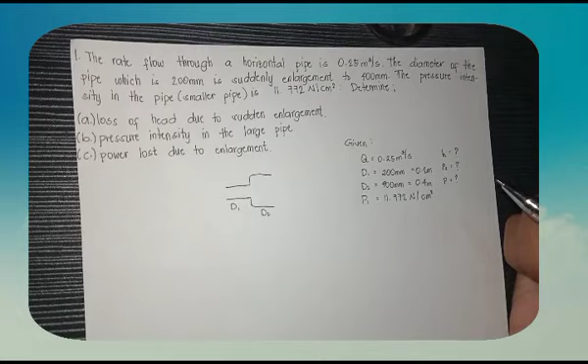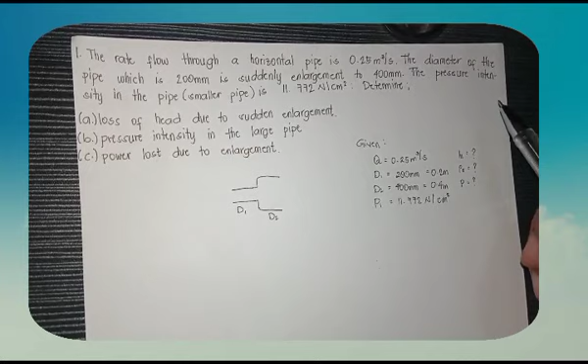Okay, let's proceed to the example of minor losses. Given: the rate of flow through a horizontal pipe is 0.25 cubic meter per second. The diameter of the pipe, which is 200 mm, is suddenly enlarged to 400 mm. The pressure intensity in the smaller pipe is 11.772 Newton per centimeter squared. Determine: A. Losses of head due to sudden enlargement. B. Pressure intensity in the large pipe. C. Power lost due to enlargement.

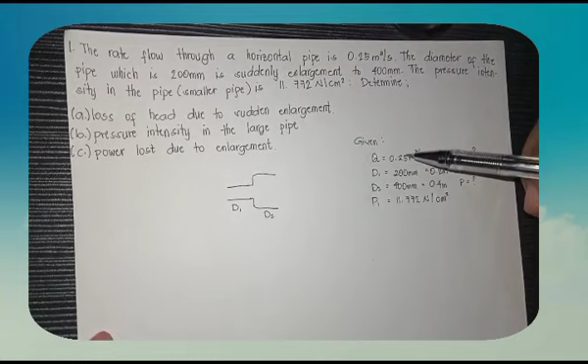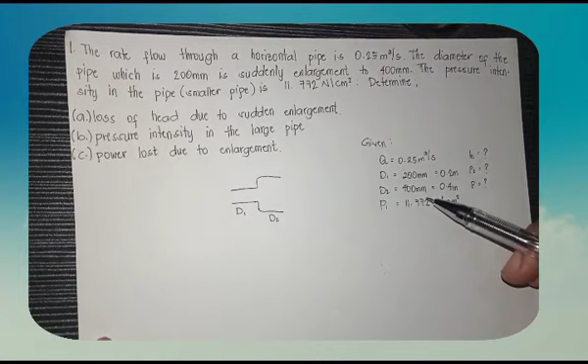So we have this pipe where the diameter is 200 mm and it suddenly becomes larger. We have D sub 2 which is our diameter at 400 mm. We're given that our discharge is 0.25 cubic meter per second. We have D sub 1 at 200 mm, which we convert into meters, making it 0.2. Same with the 400 mm.

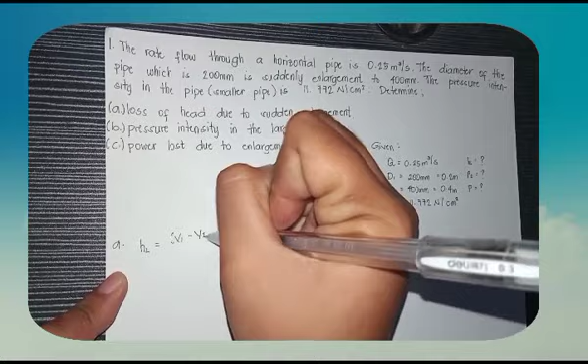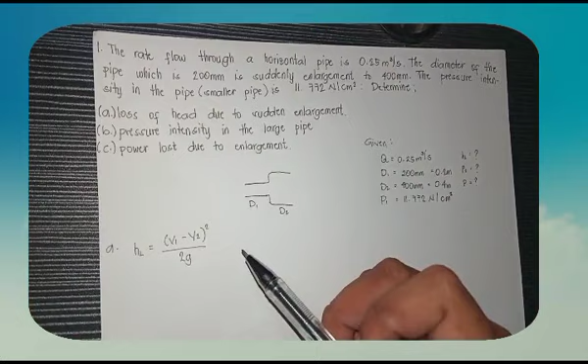So our P sub 1 is 11.772 Newton per centimeter squared. Okay, so first let's determine the loss of head due to sudden enlargement. In our module we have the formula for sudden enlargement: head loss equals V sub 1 minus V sub 2 squared all over 2G. Before we can use this formula, we need to get area 1 and area 2.

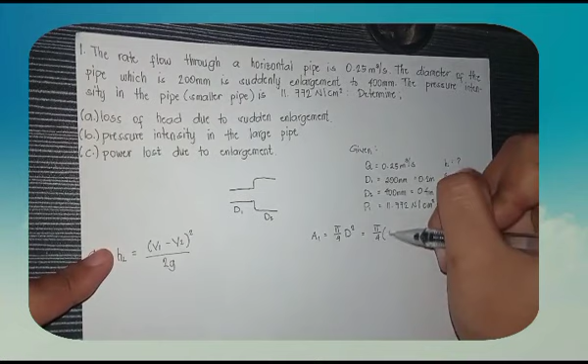So how do we get area 1 and area 2? Area 1 is equal to pi over 4 times D squared, using our diameter 1. Since our D sub 1 is 0.2, the answer is 0.03141 meter squared.

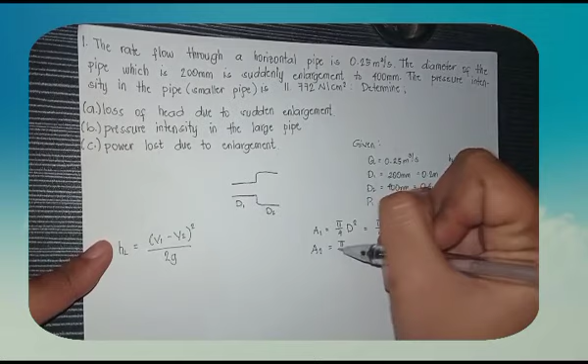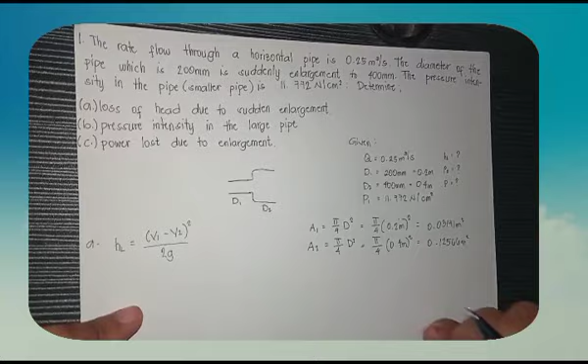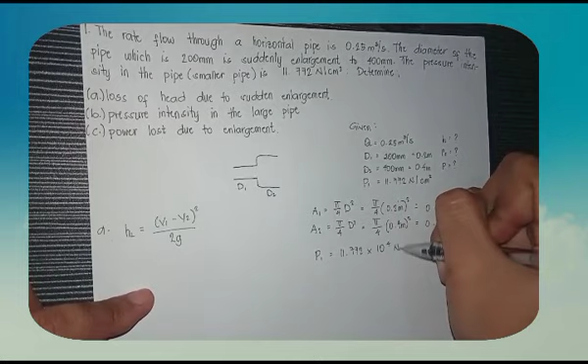Meter squared. Now our P sub 1, since it's in centimeter squared, we convert it to meter squared by multiplying by 10,000. So P sub 1 equals 11.772 times 10 raised to 4 Newton per meter squared. So that's now our P sub 1.

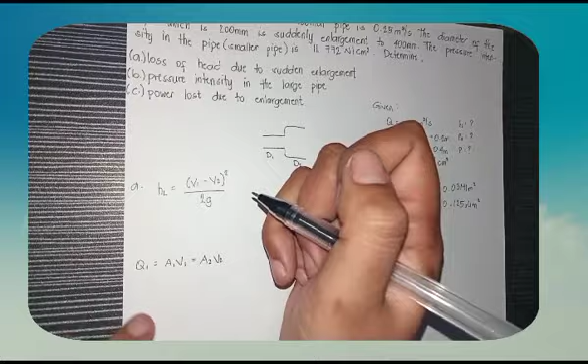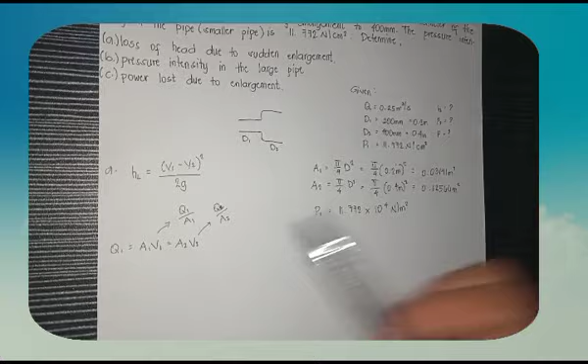Now, to apply area 1 and area 2, the formula for Q is: Q sub 1 equals area 1 times V sub 1, equals area 2 times V sub 2. Since V sub 1 and V sub 2 equal discharge over area 1, and similarly V sub 2 equals discharge sub 2 over area sub 2. Since we only have one given discharge value, which is 0.25, that stays the same — only the area sub 2 changes.

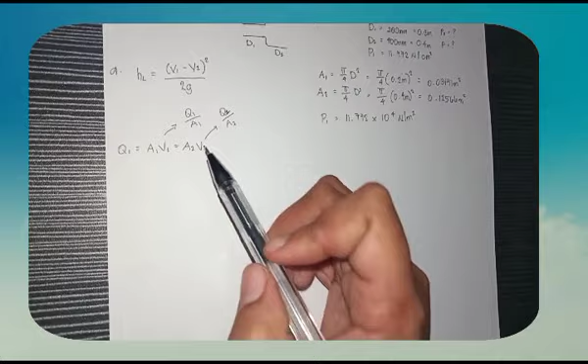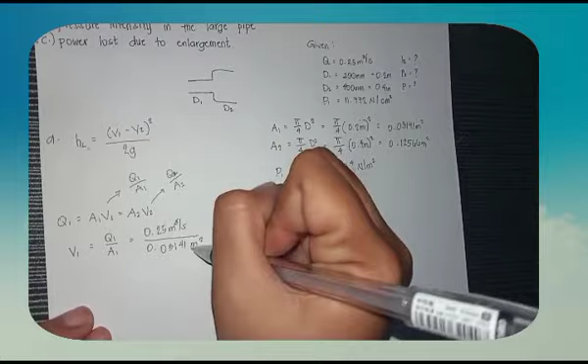Okay, let's proceed. To get the value of V sub 1: V sub 1 equals discharge sub 1 over area sub 1, which is 0.25 meter cube per second over our area 1 of 0.03141 meter squared. Canceling the units, we're left with meters, and the answer is 7.96 meter per second.

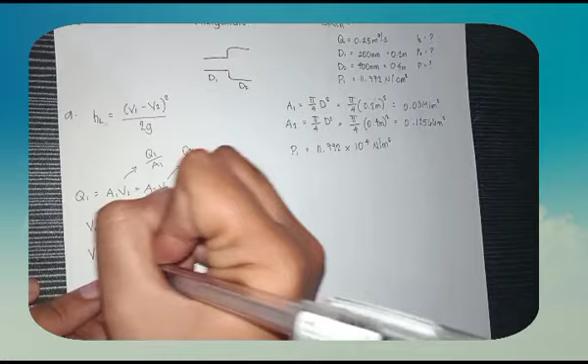So now we have area sub 1 and velocity sub 1. For velocity sub 2: velocity sub 2 equals 0.25 meter cube per second over our area sub 2 of 0.12566 meter squared. So the answer here is 1.99 meter per second.

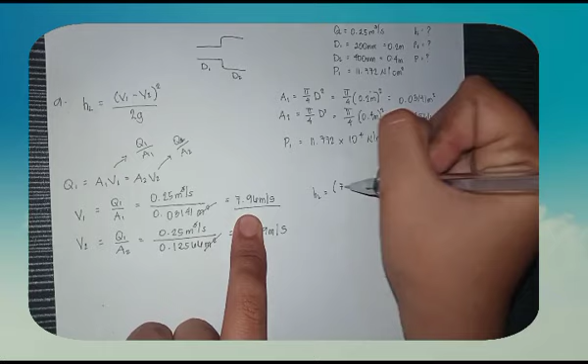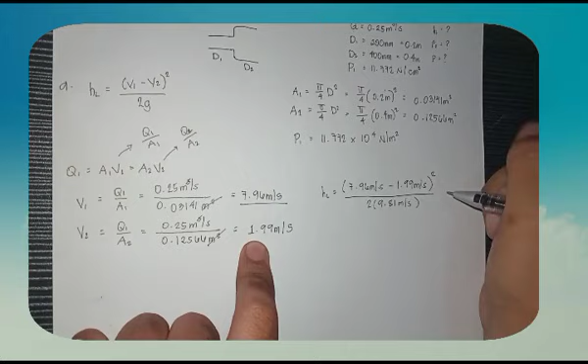Now that we have the values for the formula, let's substitute to get the head loss due to sudden enlargement. HL equals V sub 1, which is 7.96 meter per second, minus V sub 2 which is 1.99 meter per second, squared, all over 2 times 9.81 meter per second squared. So the answer is 1.816 meters.

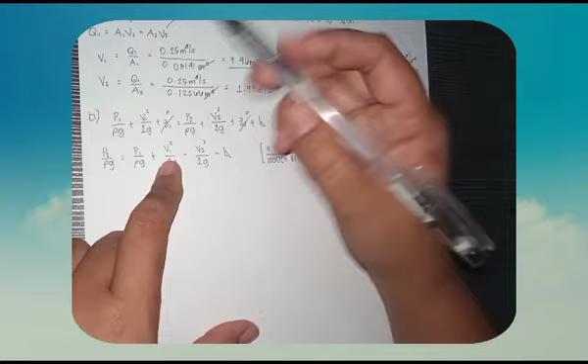times 9.81, plus V sub 1 which is 7.96

squared over 2 times 9.81 minus V sub 2 which is 1.99 squared over 2 times 9.81 minus our HL which is 1.816. So when we calculate this, we get P sub 2 over rho G equals 13.21

meter of water. So since we haven't found P sub 2 yet, we need to get the actual value of P sub 2.

Now, P sub 2 is equal to the answer 13.21 times rho times gravity. So,

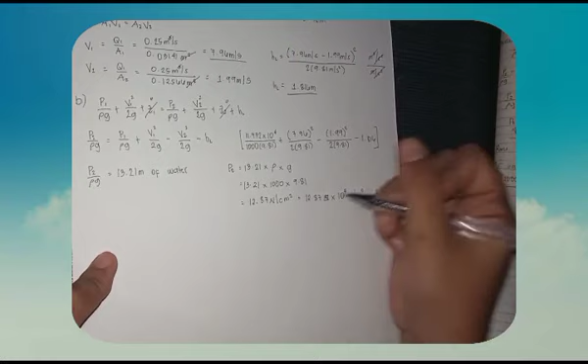Let's proceed to find the power loss due to enlargement. Since we're finding power, the unit will be kilowatts. So, letter C,

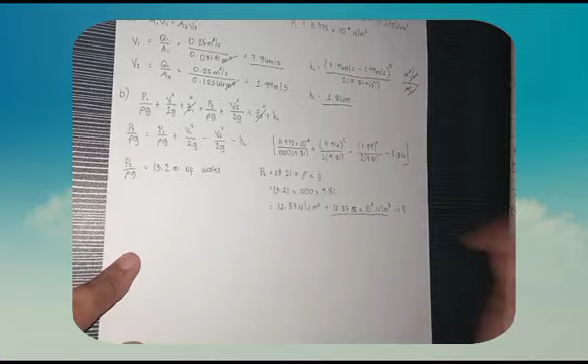P is equal to rho G, then our discharge times our head loss, divided by 1,000.

So let's just substitute. We have 1,000 for rho, times 9.81, times our Q which is 0.25, and then times our HL which is 1.816, all over 1,000.

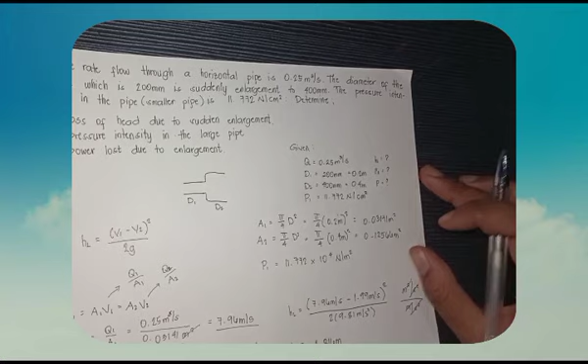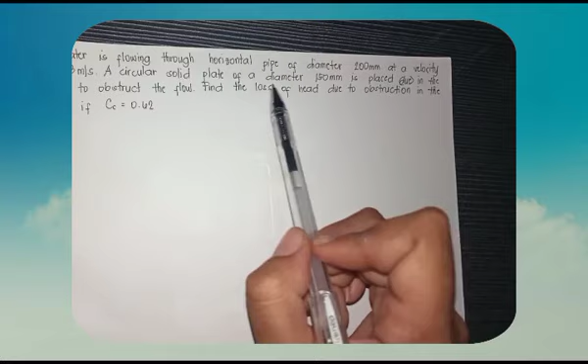So for our next problem, we have water flowing through a horizontal pipe of diameter 200 mm at a velocity of 3 meters

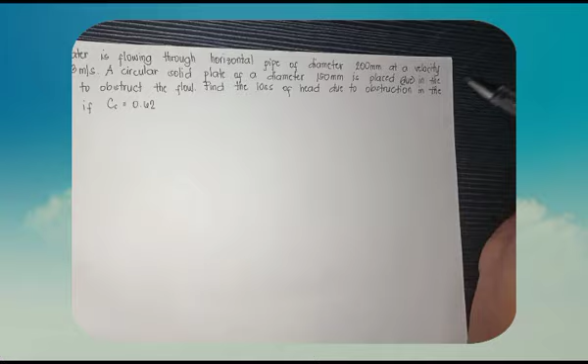per second. A circular solid plate of diameter 150 mm is placed in the pipe to obstruct the flow. Find the loss of head due to obstruction in the pipe if C sub C is equal to 0.62.

So for our given, we have the diameter, which is 200 mm, that is 0.2 meter. We also have velocity of 3 meters per second.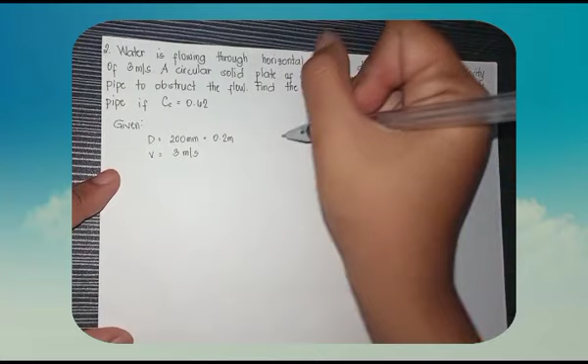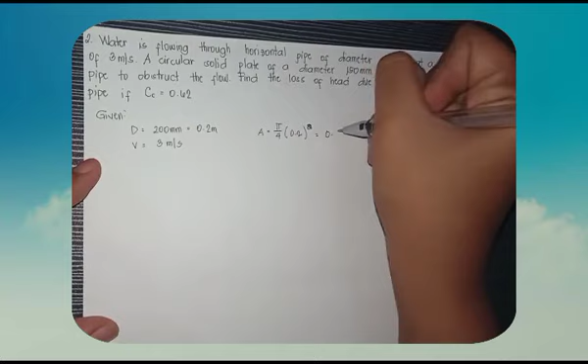And then for our area, using our 0.2 raised to 2, we can get our area which is 0.3141 meter squared. So for the obstruction,

we can use the small diameter we have here, 150 mm, which is 0.15 meter. And then our C sub C is 0.62.

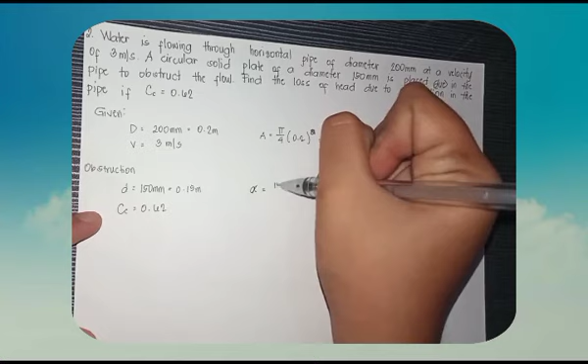And we have an area here for that, times 0.15 squared, which is equal to 0.0176.

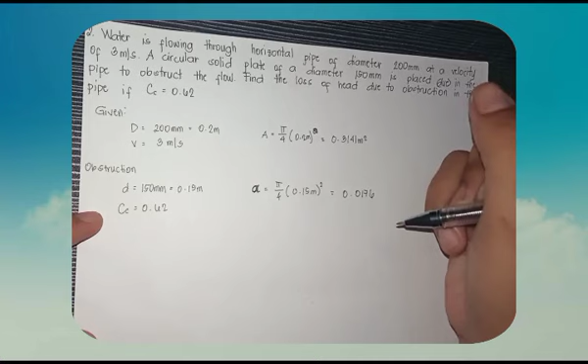Okay, meter squared. Since we've found the area, for the head loss due to obstruction, we have the formula H loss is equal to

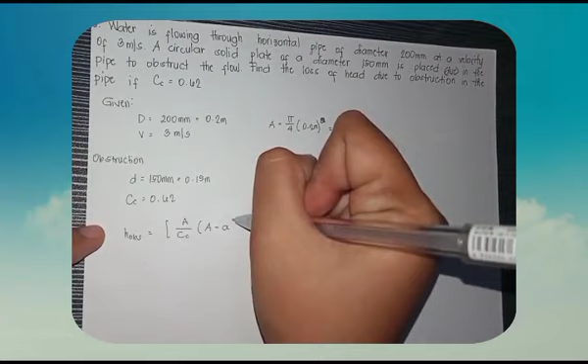A over C sub C times our big A and the small one, minus, and then minus 1, then squared, times V squared over 2G.

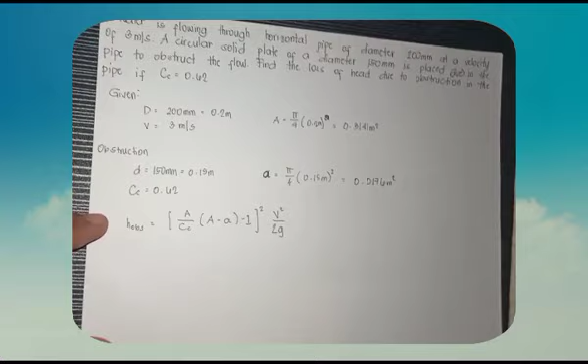So now let's substitute. For A, we have 0.314 meter squared over our CC which is 0.62

minus, or rather times, our A again which is 0.3141 meter squared minus our small a which is the obstruction,

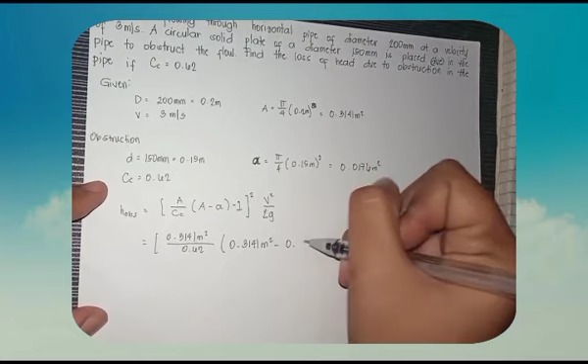0.0176 meter squared, minus 1, squared, times our velocity which is 3 meters per second squared, all over 2 times 9.81 meter per second squared.

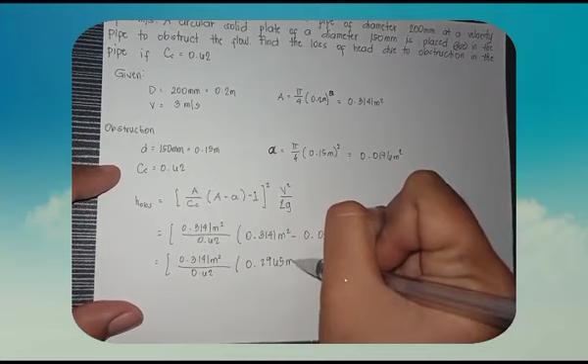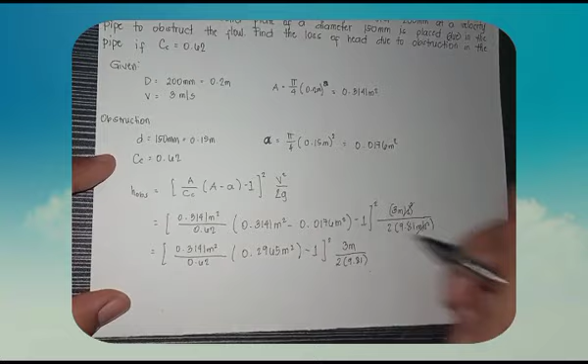And then all over 2 times 9.81. So that cancels out.

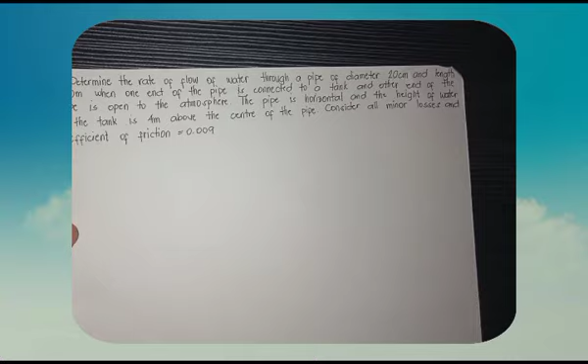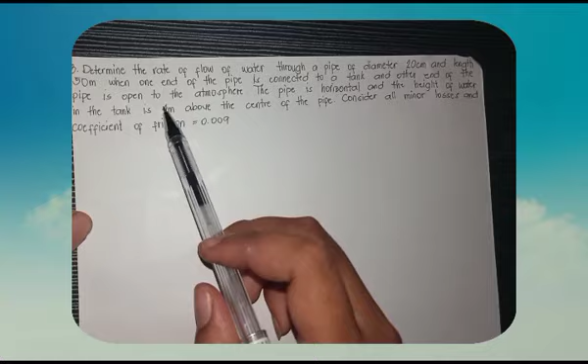Okay, sa next example natin: determine the rate of flow of water through a pipe of diameter 20 cm and length 50 meter when one end of the pipe is connected to a tank and the other end of the pipe is open to the atmosphere. The pipe is horizontal and the height of the water in the tank is 4 meters above the center of the pipe. Consider all minor losses and coefficient of friction is equal to 0.009.

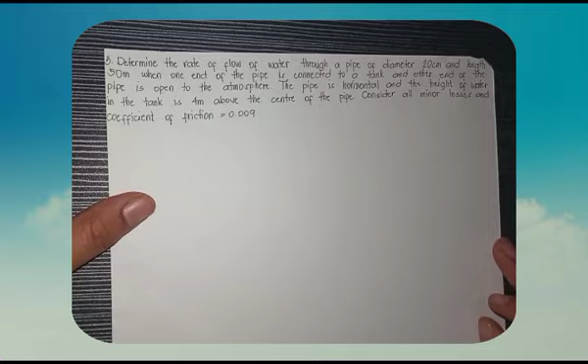Dito, gagamitan natin ng Bernoulli's equation. Pero bago yan, identify muna natin yung mga given. Yung given natin dito is D is equal to 20 cm, convert into meter, 0.2 meter. Yung length natin na 50 meter. Tapos yung friction na 0.009. At yung Z sub 1 natin na 4 meter.

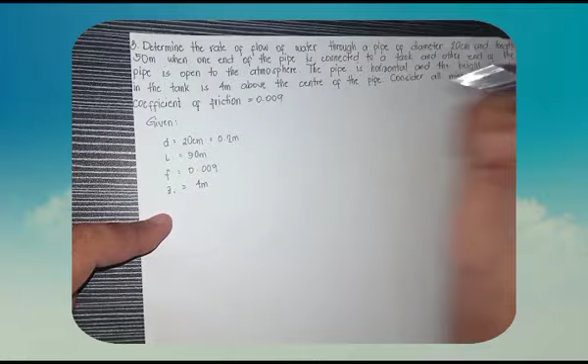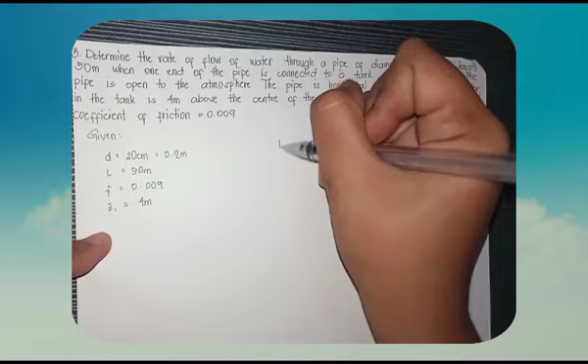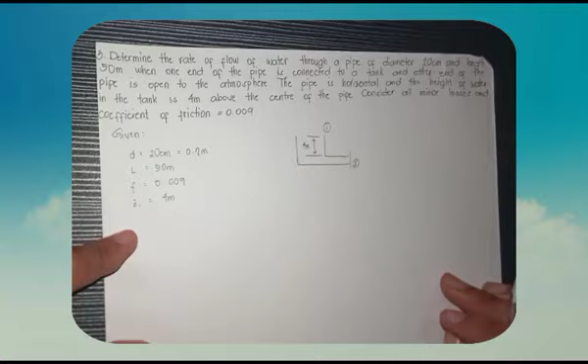Sabi kasi dito, height of water in the tank is 4 meter above. Ibig sabihin, halimbawa, ito yung tank natin. Yung tubig dito, hanggang dito, ito yung nasa 4 meter. Meron tayong section dito - dito yung section 1 at dito yung section 2. Okay, simulan na natin kukunin kung ano ba yung mga findings.

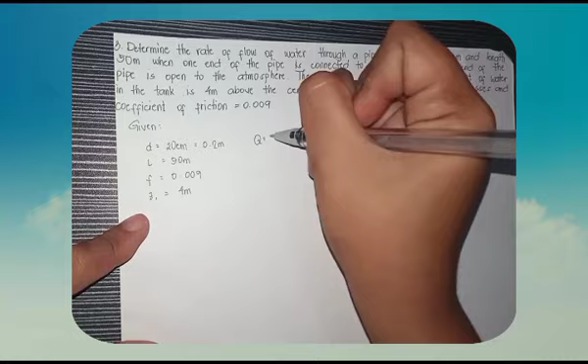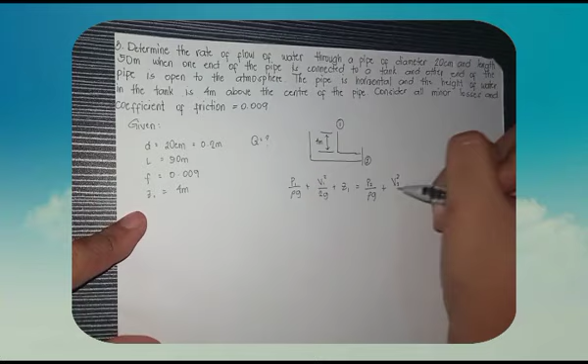Since ang findings lang naman dito is yung flow rate, isusulat natin ngayon yung formula ni Bernoulli's, which is P sub 1 over rho G plus V sub 1 squared over 2G plus Z sub 1 is equal to P sub 2 over rho G plus V squared over 2G plus Z sub 2 plus all losses.

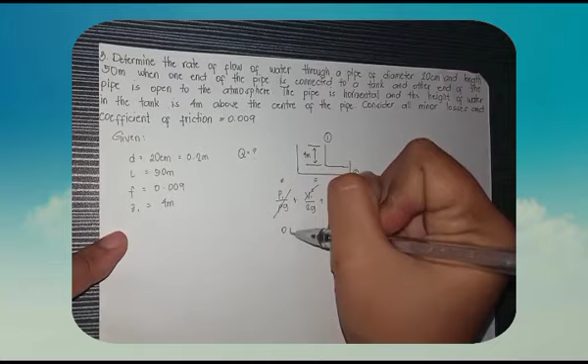Since wala tayo ditong P sub 1, automatic 0 na to. Ganun pa rin sa P sub 2. At wala rin tayong V sub 1, so 0 din yan. Ngayon, yung mga natira is ito na lang: 0 plus 0 plus 4, since yung Z sub 1 natin is 4, is equal to 0 plus V sub 2 squared all over 2G plus H sub i plus H sub f.

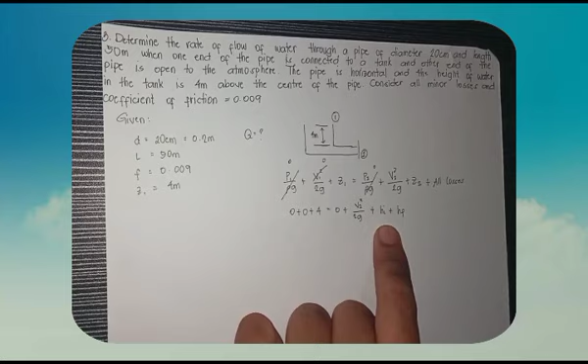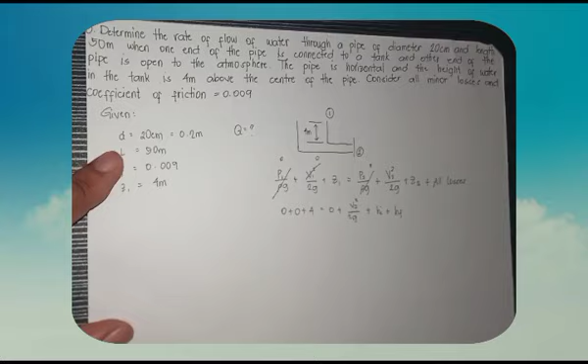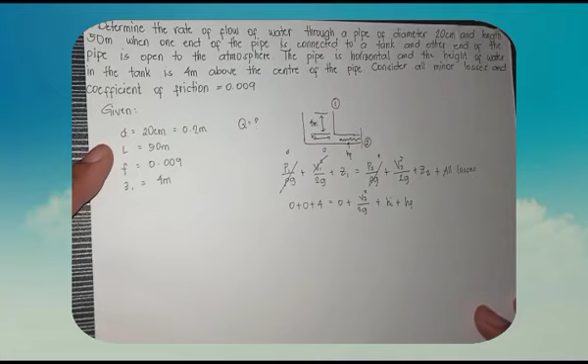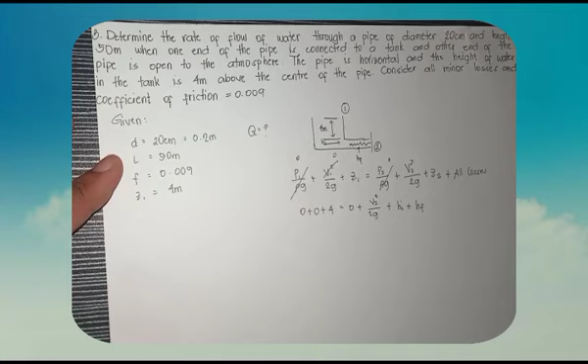Itong H sub i, ito yung entrance losses natin. Meron tayong equation ng H sub i, entrance losses, at meron ding H sub f. Kung dito pa sa figure natin, nagaganap - dito yung H sub i natin papunta dyan, at pagdating niya dito, maging turbulent na, saka pa yung head loss o H sub f natin. Ngayon, bago natin ma-solve o makuha yung findings, kailangan muna natin i-apply yung mga formula nitong dalawa.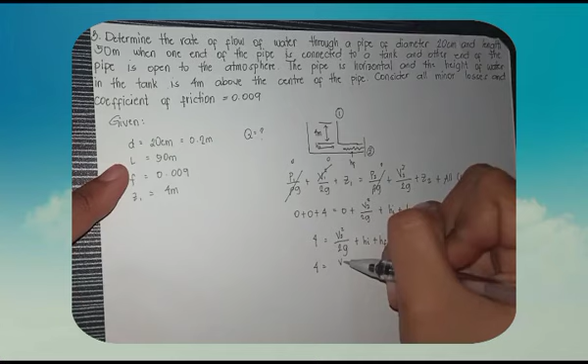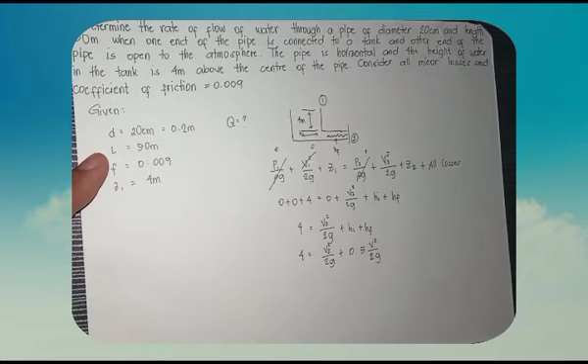Meron tayo ditong 4 is equal to V squared over 2G plus H sub i plus H sub f. So, 4 is equal to V sub 2 squared over 2G plus yung H sub i natin, ang formula niya is 0.5 V squared all over 2G, at yung H sub f natin na 4FLV squared all over 2GD.

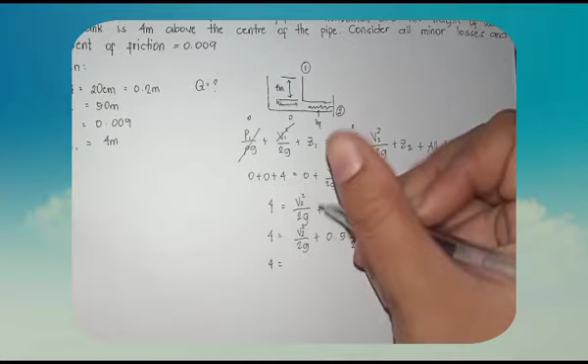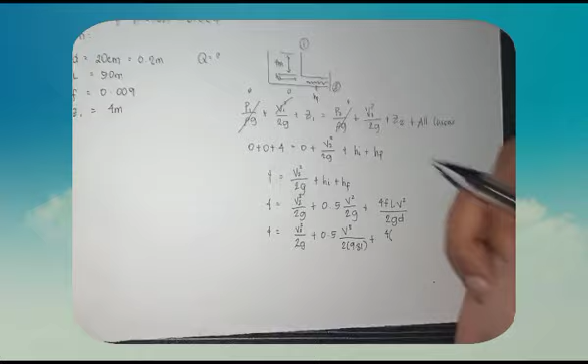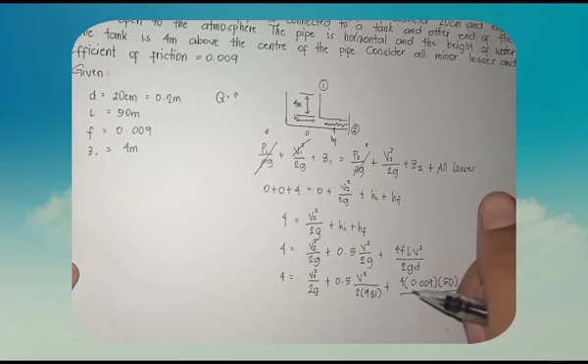Okay, ngayon substitute na natin yung mga given nila. 4 is equal to V squared over 2G plus 0.5 V squared. Kasi ang hahanapin natin dito is yung value ng V squared. 2 times 9.81 plus 4, may F tayo doon na 0.009, at may length tayo na 50 meter, times V squared, all over 2 times 9.81, then yung diameter natin na 0.2.

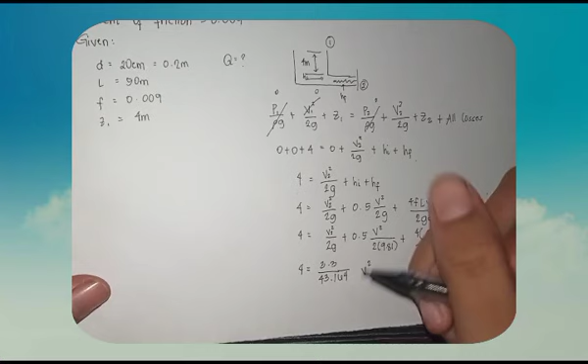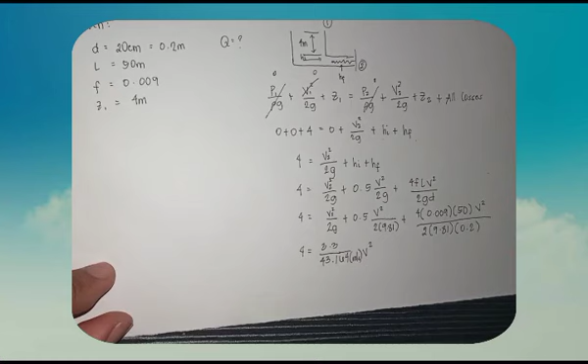So, 4 is equal to 3.3 all over 43.164 V squared - kinumbine ko lang yung mga constant at yung V squared. Ngayon, para makuha natin yung V squared, i-divide natin both.

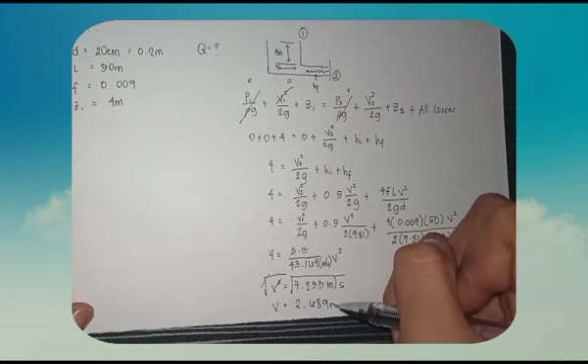Makukuha na natin ngayon yung value ng V squared: 7.233 meter per second. Para makuha talaga natin yung V, kailangan natin i-square root both side para mag-cancel. Ngayon, ang V natin is nasa 2.689 meter per second. So ito na yung V natin.

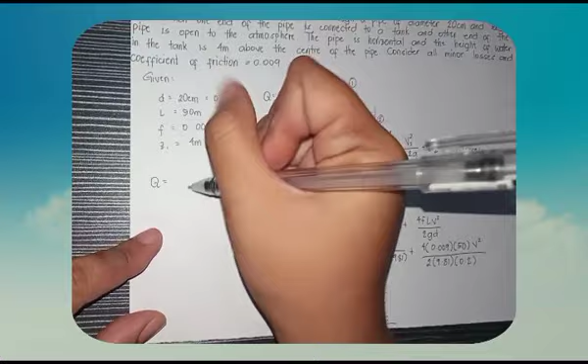Ngayon, makukuha na natin ngayon yung value ng flow rate, which is yung findings natin. Ang formula niyan is Q is equal to AV o VA. Since ang A natin is 0.0314, ito yung area natin - makukuha rin ito kasi nga pi all over 4 times 0.2 squared.

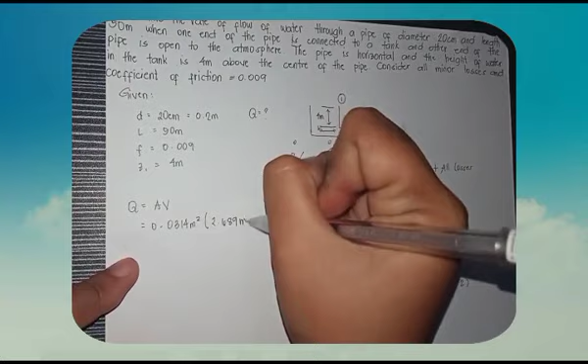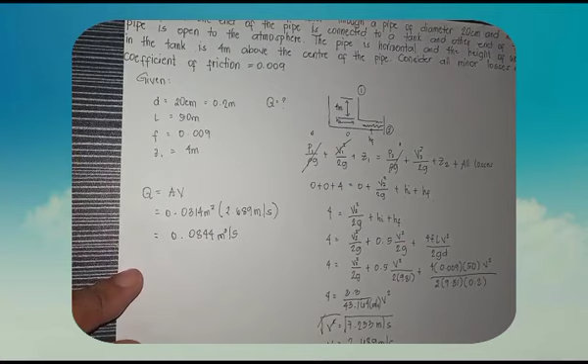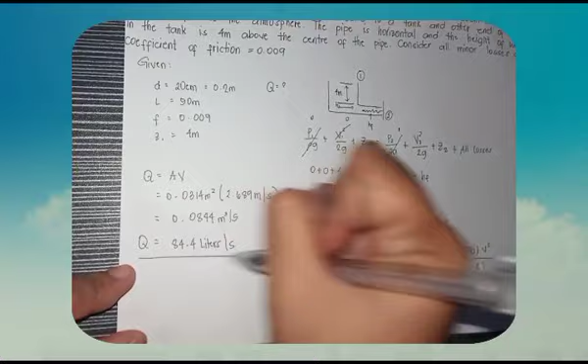Makukuha na natin tong sagot na to: meter squared times 2.689 meter per second. Ngayon, ang Q natin is nasa 0.0844 meter cube per second. Since tank, o-convert natin itong cubic meter per second into liter - in 1 cubic meter per second, meron tayong 1,000 liter per second. Ngayon, ang Q natin is equal to 84.4 liter per second. Okay, ito na yung sagot sa findings natin.